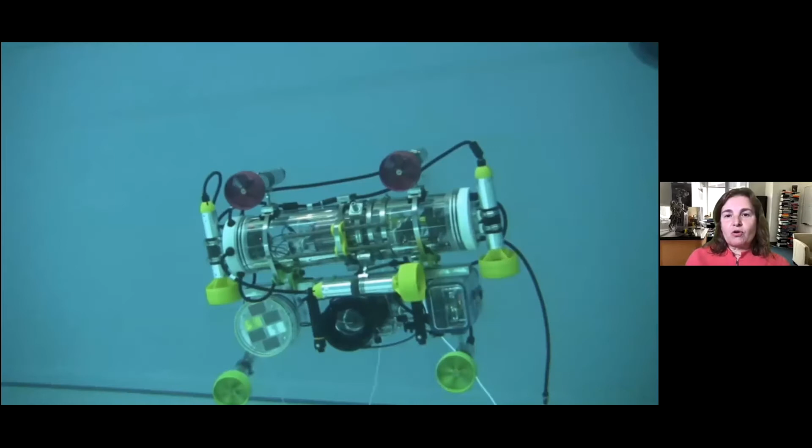But building this robot was really about love. Amour was lovable, agile, and nimble. It moved elegantly like an underwater helicopter. It took beautiful photos, and it could transmit them in high resolution video. All of these capabilities were enabled by innovative ideas.

Now, one very hot summer day, we were off the coast of Singapore after some experiments with sponsors, and we decided to see just how fast Amour could go. We were feeling confident that day, and we took off several safety components of Amour to give it more juice, and then off the robot went. I should tell you that it took us 3 years to develop this robot, and this was our only unit. And then we waited and waited and waited, but Amour did not return, and we were devastated.

Now, the thing about the work we do in robotics is that the first instance of a robot takes enormous amount of time to develop, but subsequent versions take much less time. And it is also the case that great failures teach us great lessons. So we went back to the lab, and within 90 days, we made 3 improved versions of this robot. And with great hope, we took the new robots to water, and indeed they could swim, but we found ourselves wanting more. We wanted smaller, nimbler, more elegant robots.

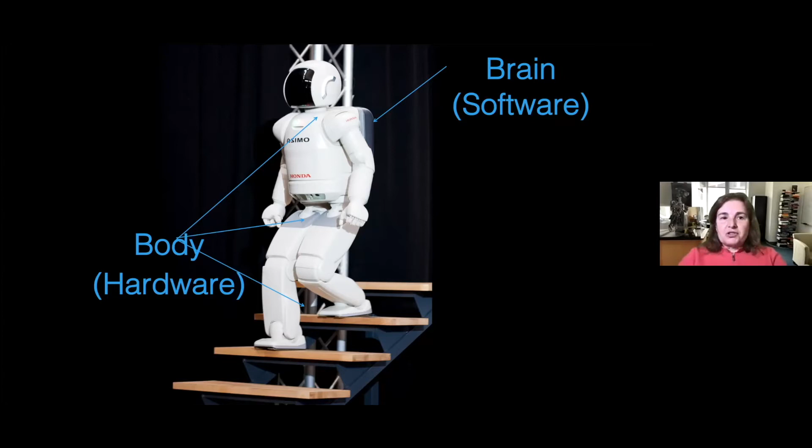Specifically, robots are made of a body and a brain. For every task, we need a body capable of doing that task, and a brain able to control the body to do the task. Right now, robots are made from scratch, and it requires real expertise, and similarly with control. So a natural question is, how can we use new tools to automate those aspects of making machines?

Well, one solution is inspired by nature. All organisms are made of cells that combine in different ways to make organisms such as snakes and ants, and organs such as lungs and hearts. So the question is, can we have robotic cells that can be composed in different ways to make different types of robot organisms? Here's a simulation that shows how a couch robot could become a dog robot.

In this case, the cell is a cube that expands and contracts by a factor of 2. The simulation shows that the computation solution for doing this is already here, but we still need to make the cell, and we do not know how to make it at a scale where the couch will be comfortable to sit on.

Now, the kinds of unit cells we can make today are too big to make comfortable dog couches, but we can make simpler things like shape-shifting trusses and support beams. Here you can see one example, the M-block.

This robot is a 2 by 2 inch cube that can move by pivoting. The secret to the movement is a flywheel inside the robot that spins very fast, and then a braking mechanism stops it suddenly. The stored momentum propels the cube forward. We call it the M-block because the M stands for magic—the robot moves as though by magic.

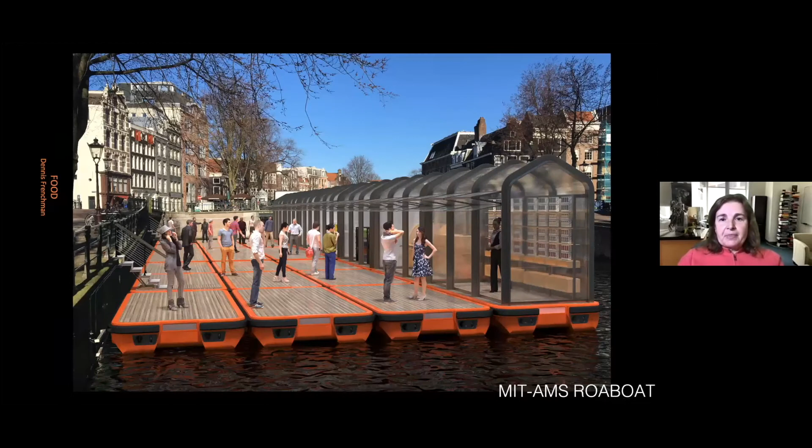They can form autonomous floating platforms for people to gather for events, for markets, that can aggregate just-in-time a water bus stop. For instance, here you can see these robotic boats, and the concept of how they will form the water bus stop. And then you can augment these robotic arms for autonomous trash collection.

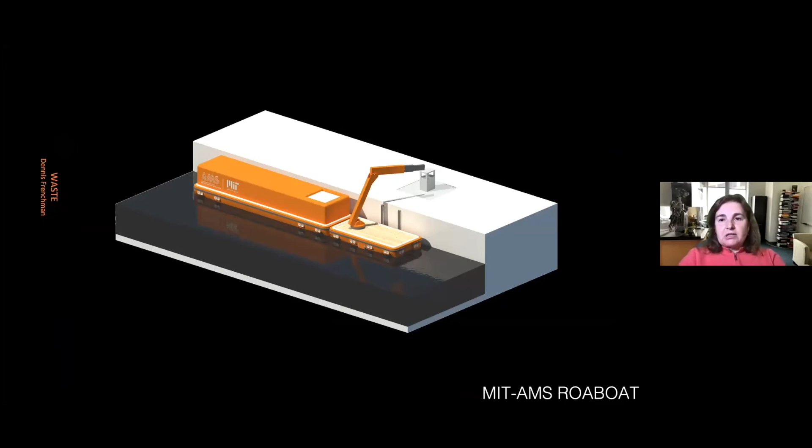Now we are on our way to creating such self-organizing robots—we call them Roboats. Here you can see a simple example of creating an autonomous platform made of multiple independent units at quarter scale. This is the quarter scale of what we are planning for a full scale.

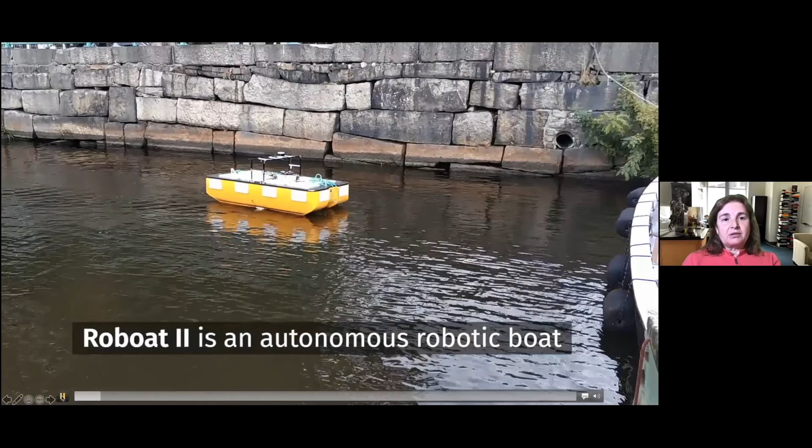By the way, the full scale is currently under development in Amsterdam, and you can see what the half scale looks like here. The full scale is being tested in Amsterdam as we speak.

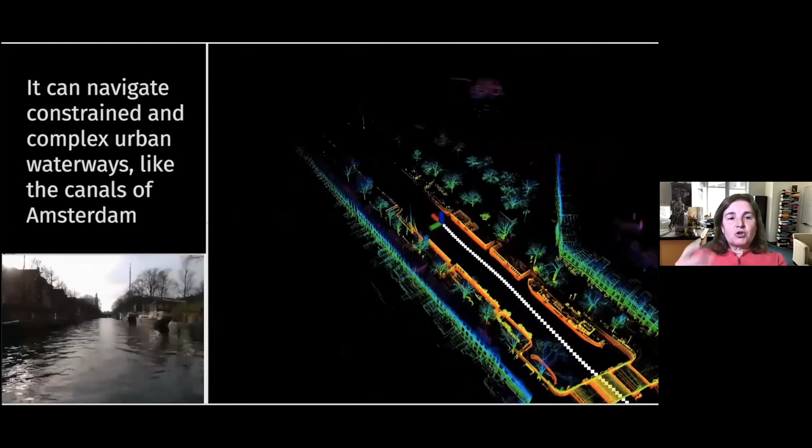Now, what's really cool about these robotic boats is that the same autonomy algorithms and systems that make robotic cars able to drive on roads also allow these robotic boats to move on water.

While we continue our work on robot cells, we have a parallel second option: to develop the coding tools that automate the design of custom robots, and the making tools that automate their fabrication.

This takes us closer to a world where you can imagine people having one robot for any physical task. Here's how this might look in the future. Take Alice—we'd like to give her the power to automate many tasks in her home.

Say she wants a playmate for her cat for when she's at work. Well, to do so, Alice would go to a new store called 24-Hour Robot Manufacturing with a rough idea of what playmate she wants.

At the store, she would explore the design space for her device with an intuitive interface, and the store will fabricate the robot at an affordable price point, and will also create the programming and control infrastructure for the robot. This is not possible today, but we are slowly developing the tools that will get us closer to this vision. In particular, my research group at CSAIL is working on this problem.

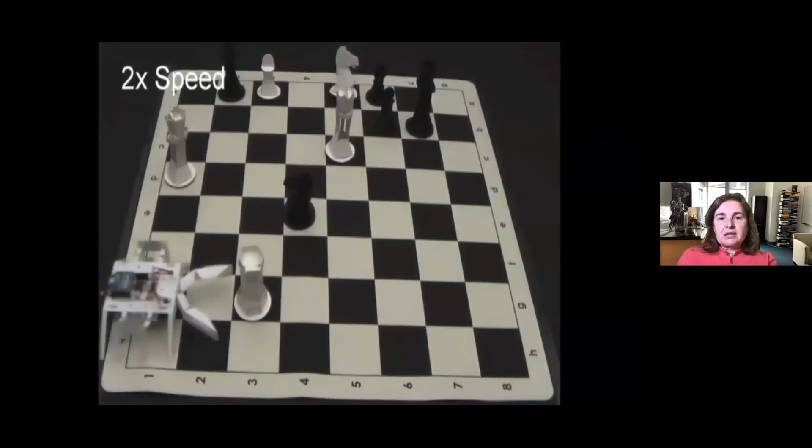Let's say Alice wants to play chess with a robot. The solution is to have a program decode the instruction, determine behavior such as pick up piece, move piece, drop off piece, and then send off the design to be fabricated and assembled. We call the robots we make this way origami robots because they're created by folding, inspired by the ancient art of origami.

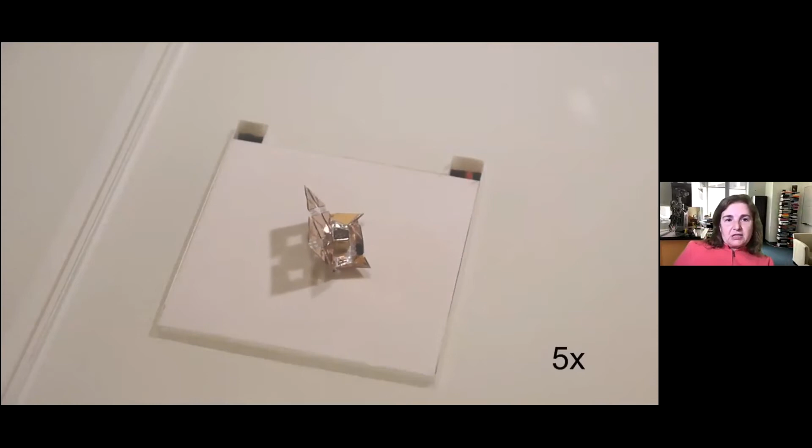We can automate the design of these robots. For instance, this robot starts as a flat piece of plastic. When you put it on a heating pad, it self-folds into a fully fledged robot that can run and carry a load.

The way we automate this design process is conceptualized in this slide. The idea is you can take any 3D object, for example this bunny, and make it by folding layers with the correct geometry. By using some new algorithms and off-the-shelf software, we can unfold the design, 3D print it, and then turn it into actual robotic devices that can be controlled.

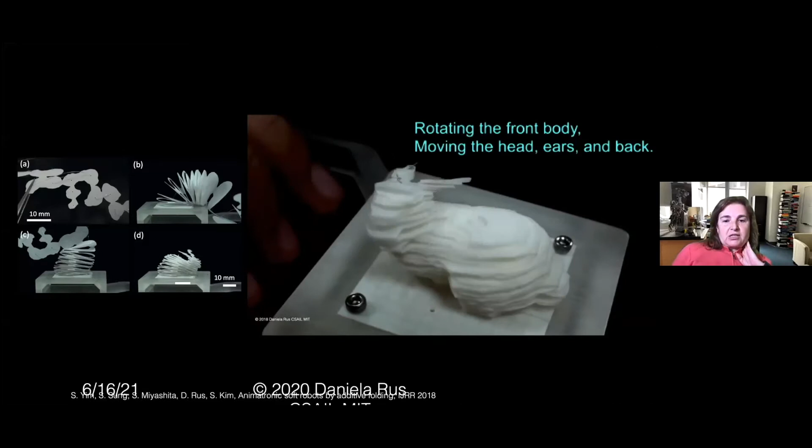So using this approach, we can automate the design and fabrication of a wide range of objects. We have an alternative solution we are working on, and that is grammar-based, bringing computation and engineering together. The idea here is to identify all the kinds of mechanical and electromechanical components for the robot, and create grammar rules for how to blend them.

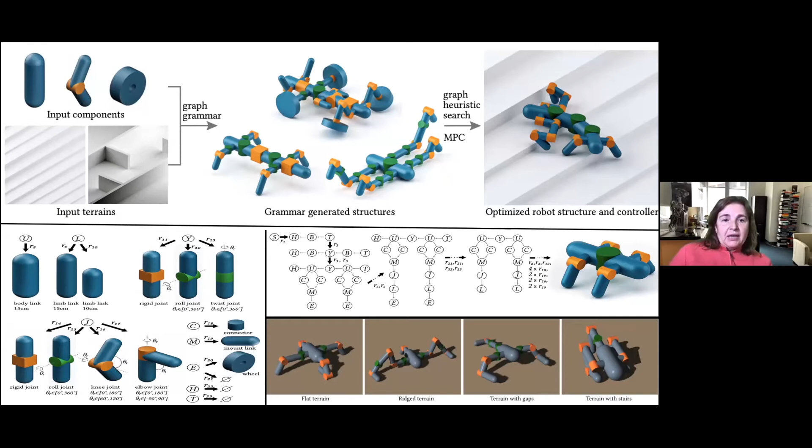And then we can use machine learning coupled with optimization to search the entire design space and develop designs that are optimized or co-optimized, where the body and the control system of the design is co-optimized for a task.

So for instance, this is what the system found for running fast over a terrain with gaps. You can change the specification to flat terrain or stairs or any other type of terrain, and you can get new types of machines in this way.

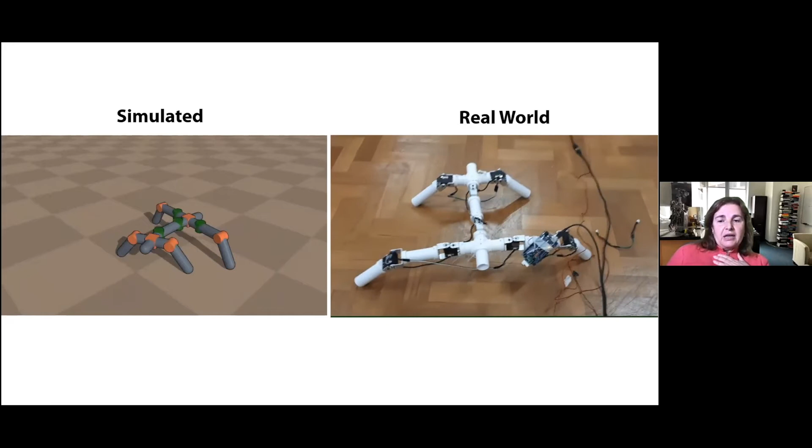Given that the grammar is rooted in mechanical components, we can then take these designs and quite quickly adapt them to fabricable designs. So using this approach, we can bring materials and machines closer together.

We can invent new types of robots that are optimized for tasks. We can code those robots. We can really get closer to a vision where we can easily and rapidly synthesize one robot for any task. This naturally brings the world of computing together with the world of hardware.

The way I see it, those of us who know how to make things and breathe life into them through programming have superpowers, because we can make real anything that we imagine. I think this is a great aspiration for all of the students who are coming to our EE and CS and computer engineering departments. I would really love to see all of our students leave our departments with this kind of superpower.

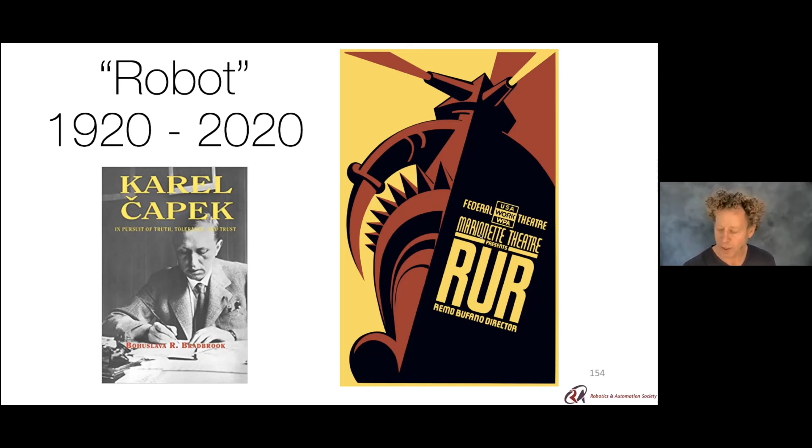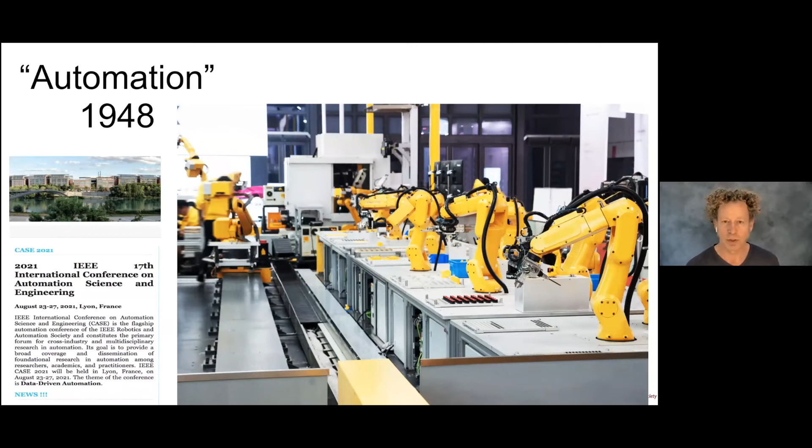I want to put the idea of robotics into context. We recently celebrated the 100-year anniversary of the word robot. It was coined in a theatrical play in 1920. In contrast, the word automation was coined in 1948 at Ford Motor Company, a term to describe robots that worked on assembly lines.

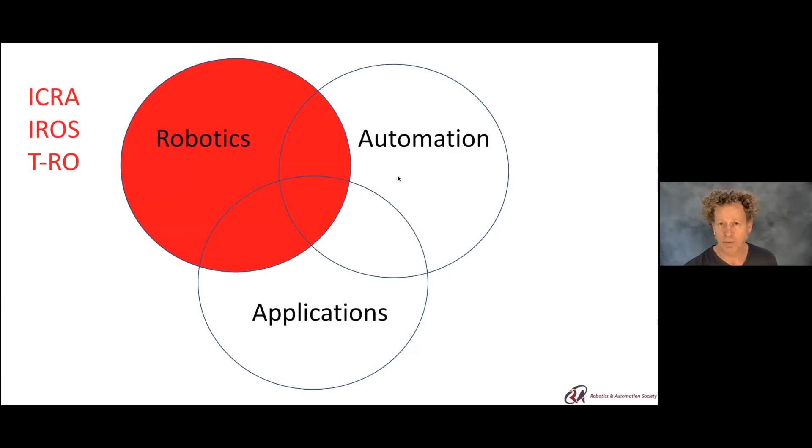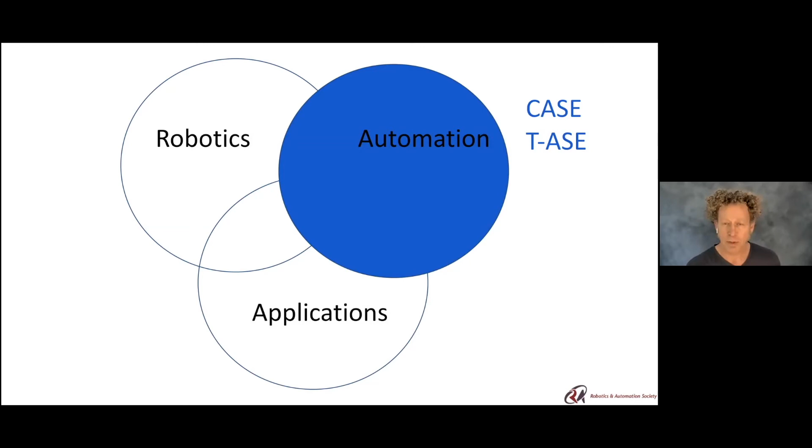I want to make a distinction here because it's subtle but very relevant to the discussion today about academics and curriculum around ECE. There's a subtle distinction between robotics and automation. I've been working with a group who came up with this Venn diagram, where robotics has its own conferences and is focused often on proof of concept, doing something for the first time. In contrast, automation has other conferences, but its focus is on taking a concept and making it work reliably, efficiently, cost effectively over a period of time. That's where you take something out of the lab and put it into practice.

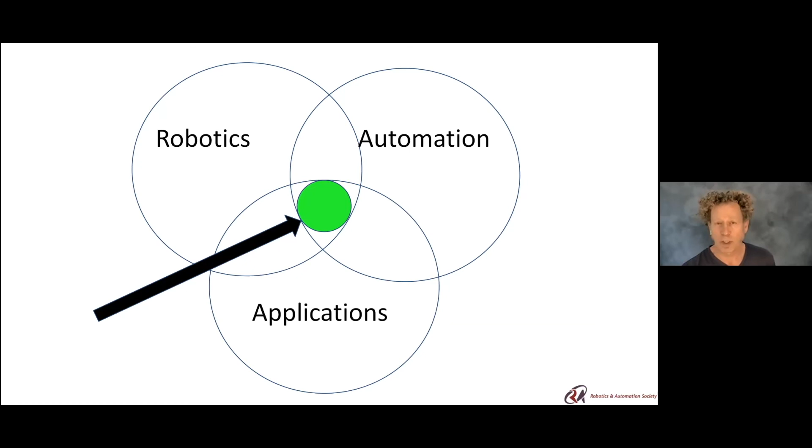The sweet spot I see is these rapidly growing areas we've talked about earlier, where robotics and automation come together with applications. This is growing tremendously, as Daniela alluded earlier. I think there's enormous synergies between the automation and robotics sides of this.

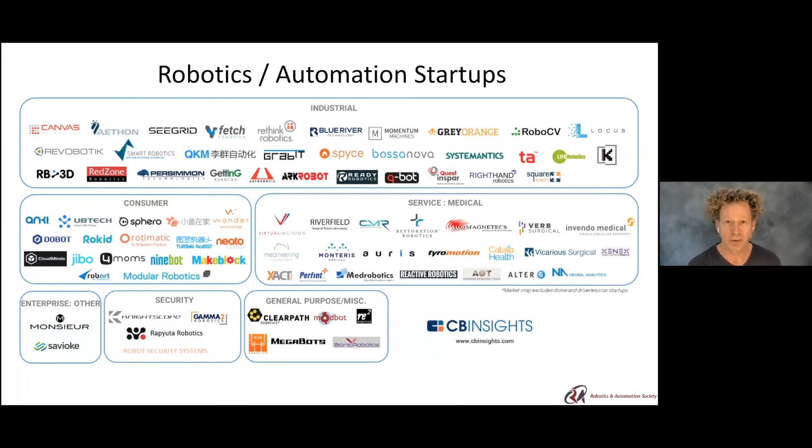There's a huge number of startups, and I think we can all relate that our undergraduates have a growing appetite for getting involved with startups. So I think it's very important to accommodate that by helping them learn some of the skills required for startup companies.

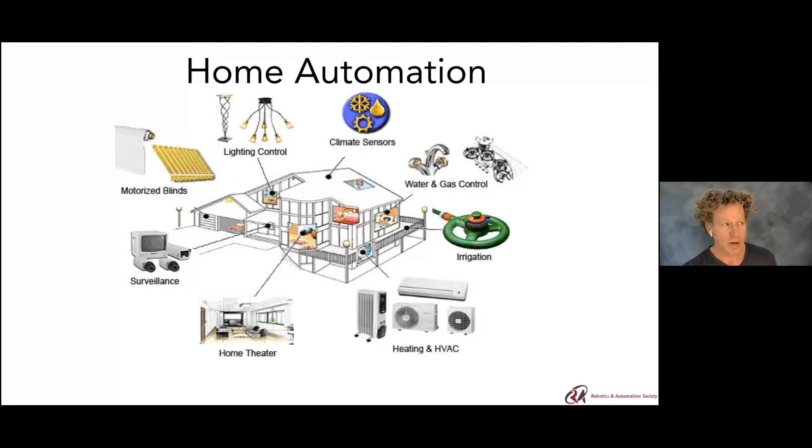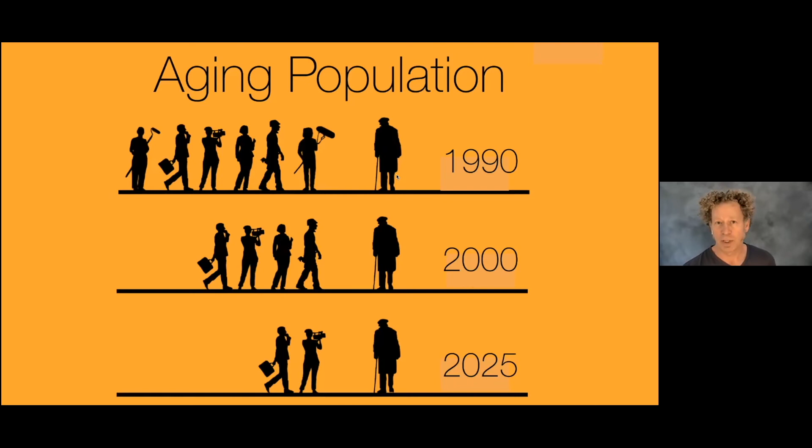One area I'm very excited about is home automation, because of this changing population. This diagram illustrates it effectively: in 1990 there were about 6 working people for every retired person. In 2000, we were down to 4. And we're very close to being at the point where there's only 2 working people for every retired person. This is the demographic world we're living in. I am a baby boomer, as my teenage daughters remind me, and the boomer generation is going to be a massive burden on the rest of society unless we develop technologies to address it.

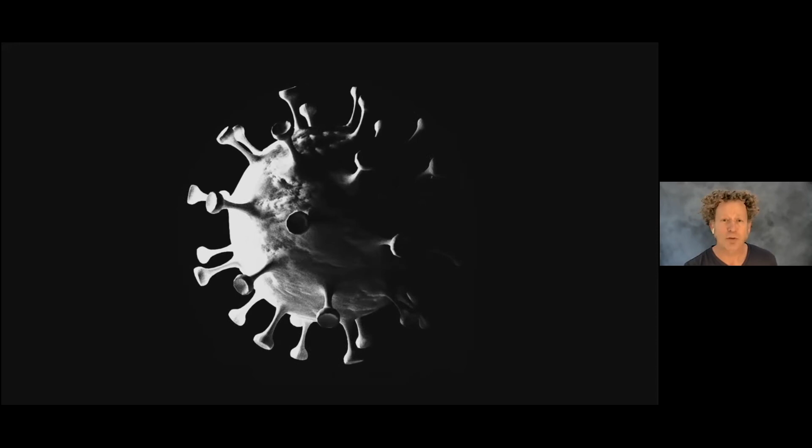I also want to address the big elephant in the room. Everything has changed - it was very akin to being hit by an asteroid, and we are coming out of it now, which I'm very excited about. But it's changed our attitudes toward robotics and automation. We're now embracing robots in new ways because they're safe, they can move about in areas where there may be viruses. They were also used for disinfecting, including disinfecting stadiums, an application I don't think existed before COVID-19. And Angela will talk more about the huge, vast growing area of drones and flying robots.

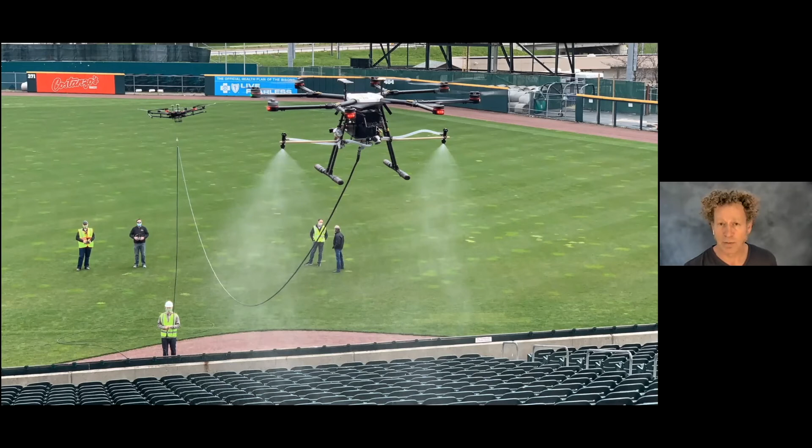They're also being used in healthcare to allow people to communicate with loved ones who are potentially contagious. The whole field of telehealth has changed remarkably in the last year. People have just learned to accept it, and I think this is going to persist after the pandemic ends.

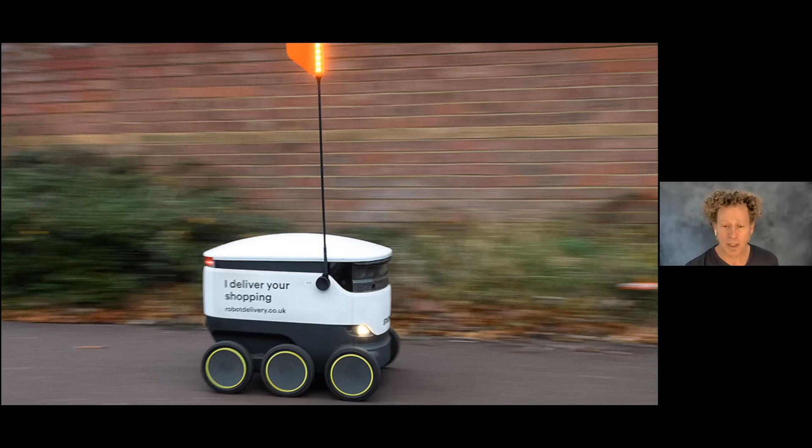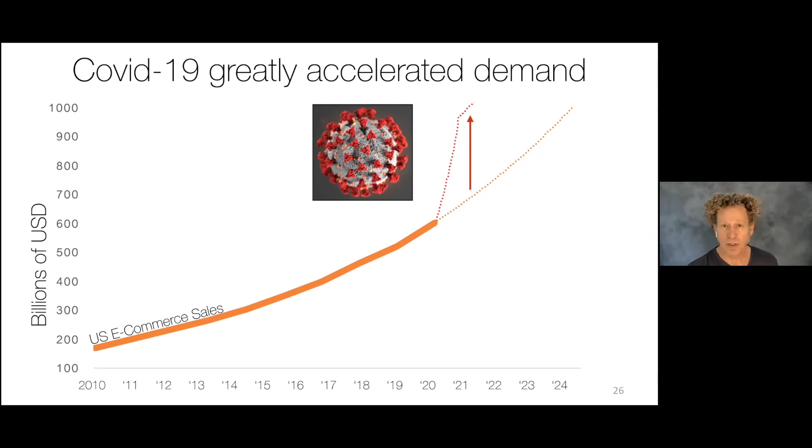It was a huge increase in e-commerce for obvious reasons. People are at home and they didn't want to go out, and e-commerce just filled the gap. Now, here's the challenge: at these delivery centers, the warehouses, there is a huge glut of packages. The demand is so large, and it's hard to find workers to fulfill that demand. Why is this an issue? Because a huge amount of the process of handling packages has to be done by hand. It can't yet be automated, or hasn't yet.

A grand challenge that has been recognized is that if we could figure out how to allow robots to pick up an arbitrary object, if we could solve that grand challenge, it would enable innovations in homes, warehouses, and factories.

My PhD student, Jeff Mahler, did his PhD where we studied this problem from a variety of perspectives. DexNet, or DexterityNet, was inspired by ImageNet. And ImageNet, as you all know in deep learning, was a breakthrough by having millions of labeled images. So our idea is to do something very analogous, to have millions of labeled three-dimensional grasps. That's DexNet.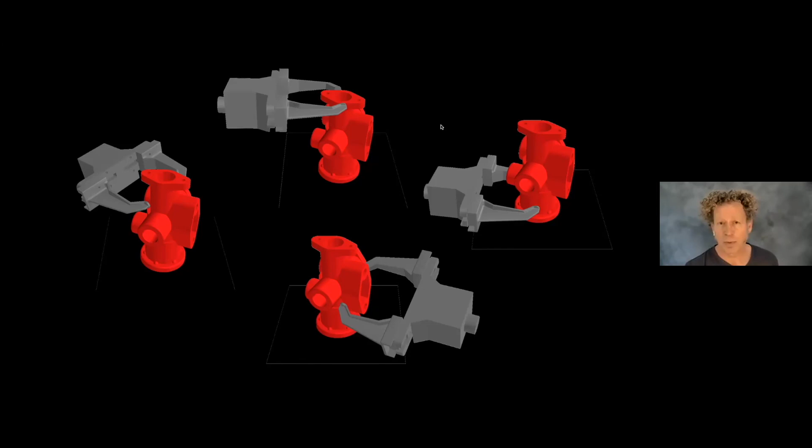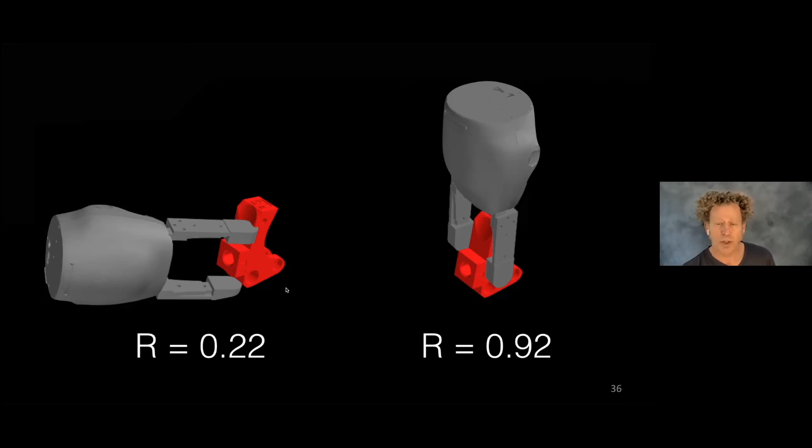I won't go into the details here, but we analyze each particular grasp, and for a typical object with 1,000 facets, for a parallel jaw gripper, there's 1 million possible grasps. So for each grasp, we want to analyze it for robustness - how robust is it to small perturbations in the relative pose of the gripper and the object, and also to parameters such as the center of mass and friction. Then we use Monte Carlo integration to add this up to come up with an estimate of the reliability of different grasps. As you can see on the left, this grasp is not as reliable as the one on the right because it has a sort of self-correcting property - it's more tolerant to these small perturbations.

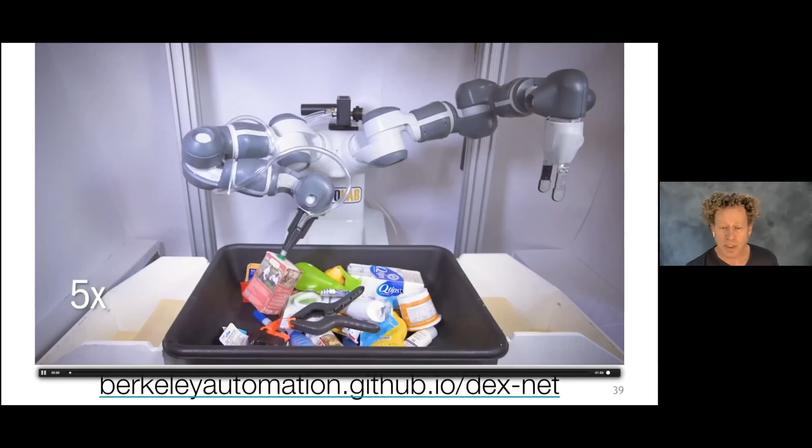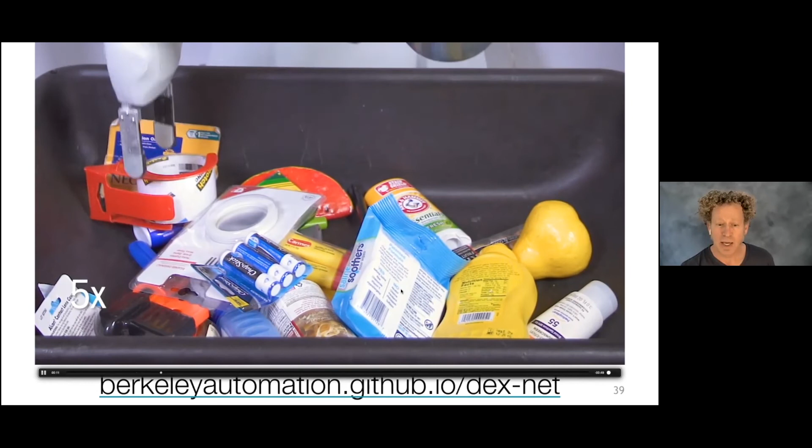That analysis can be done overnight for millions of objects, and that provides a data set. We then use that to train a deep neural network - a set of parameters, this theta star, that minimizes the loss between our data and the output of the network. And the result is a system that was surprisingly effective at grasping novel objects. None of these objects you see here were ever part of the training set, and it had essentially learned how to find grasp points.

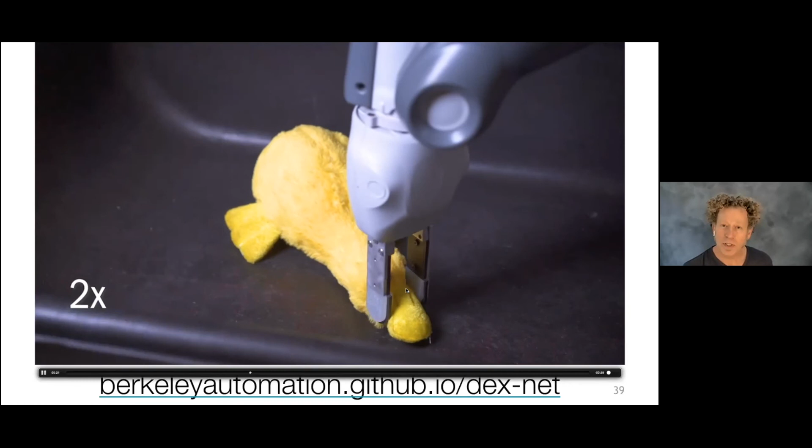I've been working on this problem for 35 years, and I like to say I've made very little progress, but this was something new. This is very exciting. We published a number of papers on this, and then, as Claire mentioned, we started a company. I won't go into the detail here, but I just want to show you a video of the system that we just recently announced.

This is for packages, operating in a real warehouse facility.

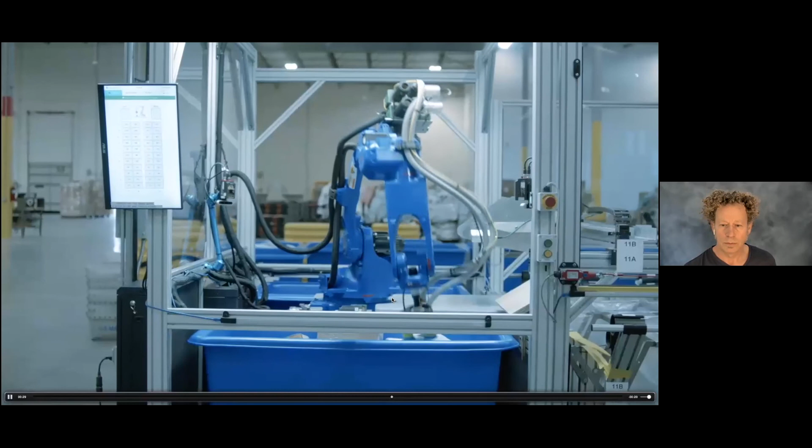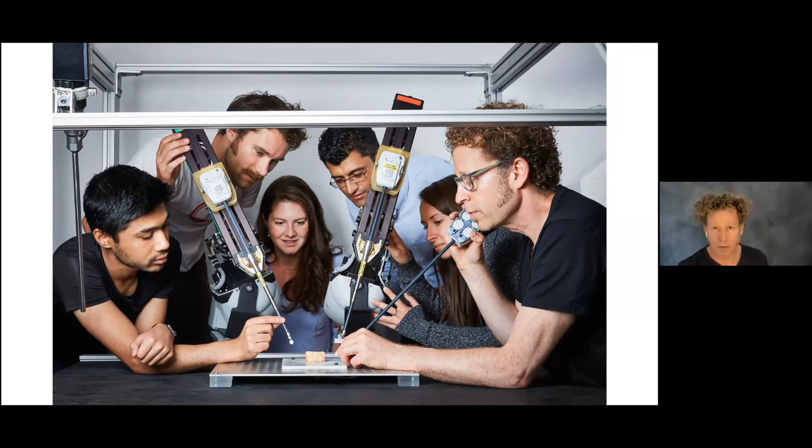Now, that system was a result of 4 amazing students, a mix of computer scientists, electrical engineers, and mechanical engineers. They were the co-founders of the company, and it's such a pleasure to watch this system actually doing work in the real world. This field of logistics, I think, is a sweet spot for robotics because it's somewhat fault tolerant - you can drop a package every once in a while, and it's not the end of the world, unlike self-driving cars. I also want to mention that I see huge opportunities in surgical robotics, and we can talk more about that later, and in agriculture.

I want to tell you very quickly a story about something very relevant to what Daniela just mentioned about design. For this we have to go to the continent of Africa. I was actually born there in Nigeria in 1961. I went back with my mother recently, and we toured a number of universities and met students who actually shared a great love of robots. We found that they were using robotic kits, such as this Lego Mindstorms, but at the cost of $300, it was prohibitive for students.

They would often have the robot system in their village for, let's say, 2 weeks, and then it would have to be moved on because they were sharing it from over dozens of schools.

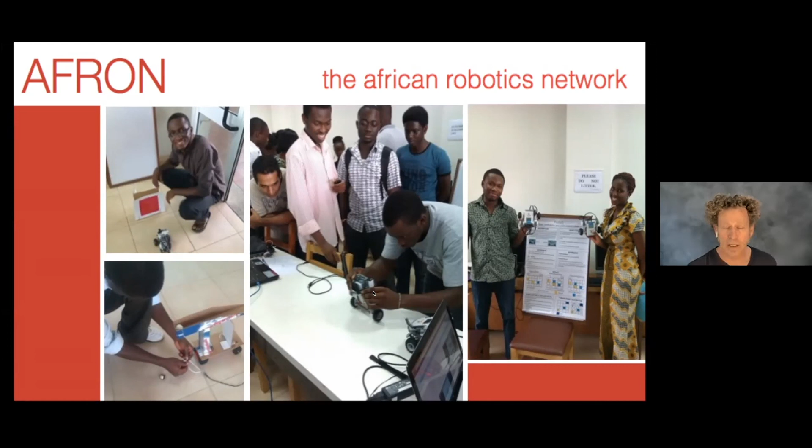So with some of the faculty there, like Ayorkor Korsah in particular, we formed the African Robotics Network, AFRON, to bring together researchers and students and anyone interested in robotics on the continent of Africa. We put out a challenge to design an ultra affordable robot, with an impossible goal of $10. We wanted to see if anybody could design a programmable robot for education that would cost less than $10.

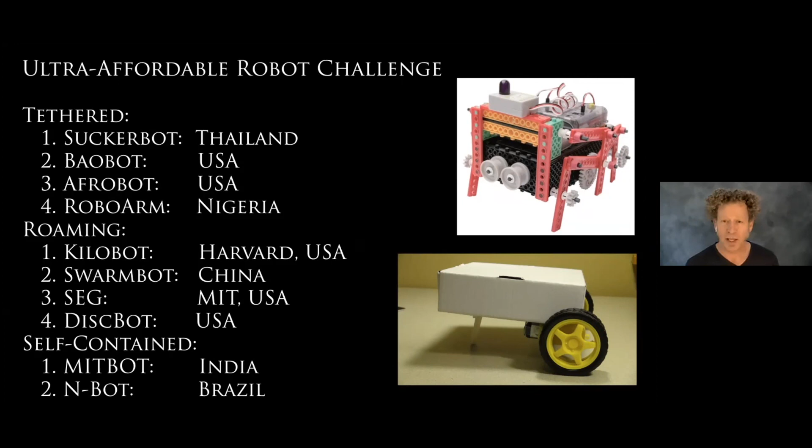So we had a prize competition. We got submissions from all over the world, very interesting and clever devices, but none of them were close to the target of $10, except one.

An inventor in Thailand, a hobbyist, would in his spare time take apart game controllers like the Sony game controller. He modified one to turn it into a robot. He took the vibrating motors and turned them around so they could drive wheels. Then he wanted the thumb switches to activate when the robot bumped into a wall, which would switch it to reverse. So he was looking around for some kind of counterweights, and came up with a stroke of genius: he decided to put 2 lollipops on the system as counterweights.

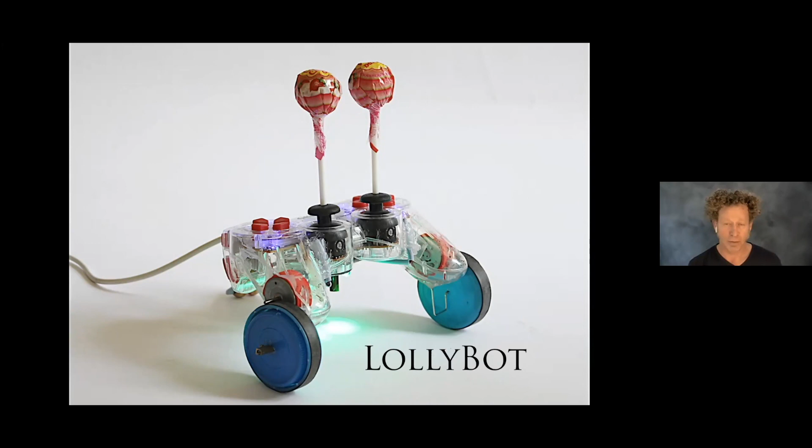So this was born, the LollyBot, which was a fantastic design. If you search on the web, you will find a specification for how to build your own, down to every resistor. What's amazing is that the total cost for this robot is $8.64. This is the power of ingenuity, and it comes from many different sources.

This is a thing I really want to emphasize: we are training a new generation of diverse engineers, and the key is bringing together people with very different backgrounds. I think there's been a trend in education, not only in engineering but in many aspects of STEM education, toward conformity—being consistent, obedient, getting everything just right. That's very important, I agree. But we also need to emphasize creativity, which means diversity: being able to interact with people very different than oneself, being tolerant of variety and change, and knowing how to collaborate and innovate together.

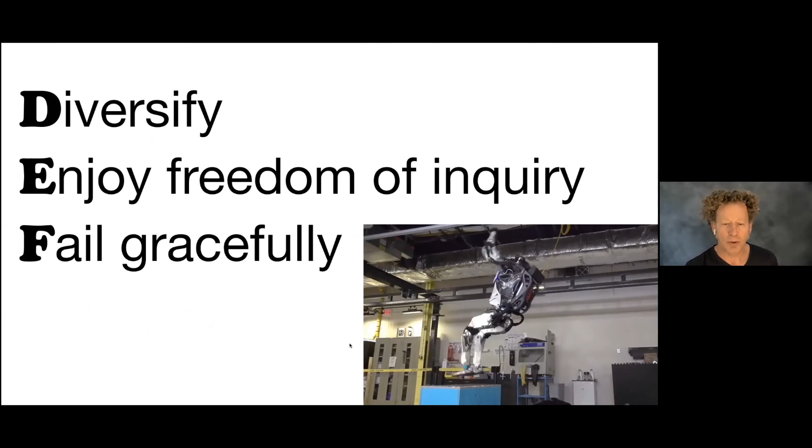So I put together this slide building on what Magnus had mentioned, about what would you recommend teaching ECE students. I have a lot more to say about this in the panel, but I just put this together as an ABCs. The first is always be coachable—something I try to teach my daughters, and even try to teach myself—which is to always take in input, be receptive to input, seek it out. Then diversify, enjoy freedom of inquiry, and fail gracefully.

Know your audience—so if you're giving a talk to department heads of ECE, you change your talk so that it matches their interests and expectations. Leadership goes without saying: mentor and be mentored. Negotiate, but don't over negotiate—that's especially relevant when you're accepting a new faculty job.

Publish, question, risk, share code and data, and credit. That's something I really believe in—don't be stingy about credit, there's no benefit to that. Many of our papers have 8, 10, 12 authors on them, but I feel it's very important to give students exposure. Take breaks, celebrate your achievements, understand things, volunteer, work hard, examine your biases, say yes—when you're asked if you want to volunteer for something, say yes—and be zealous. Just embrace the world around you.